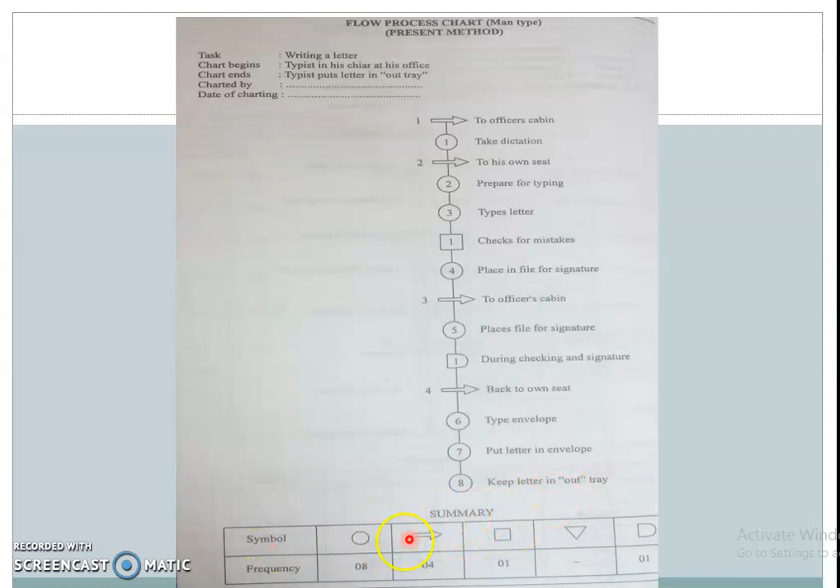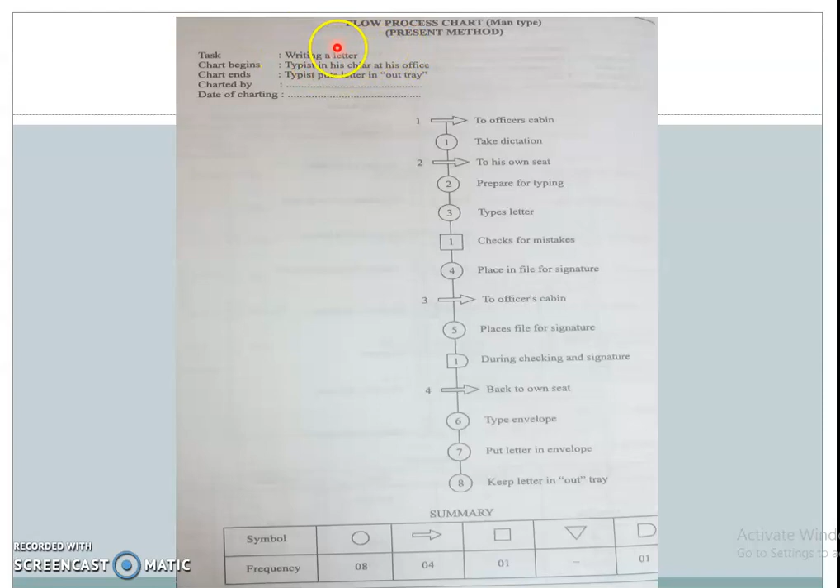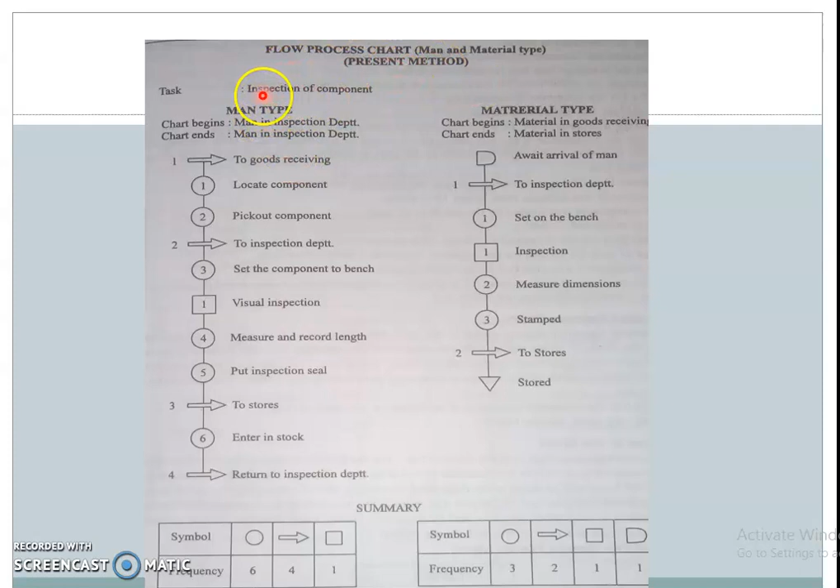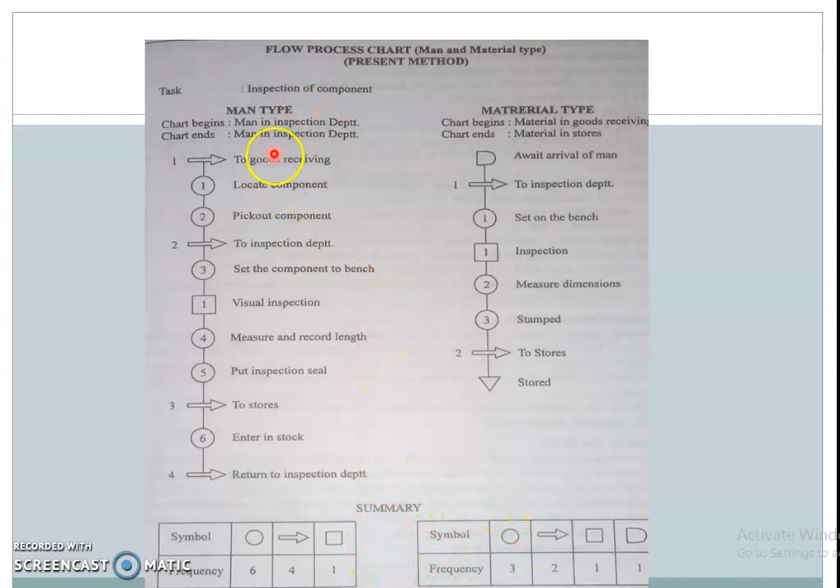So we have to summarize here how many symbols are used, how frequently they are used. So this is the summary of flow process chart, man type. Here we discussed one example of writing a letter. Similarly, you can go through these two examples of inspection of component. This is material type example. This is for man type example. And both of the summaries are mentioned here. You can go through these two examples. Let us move on.

So now, in man type flow process chart, the movement of supervisors, executives can be recorded on FPC man type. This chart follows one man or group of workers performing the same activity in sequence. So it is used for the jobs which are not highly repetitive or standardized, such as movement of workers in service or operations. So it is a practice to attach a sketch showing the movement of workers during the operation.

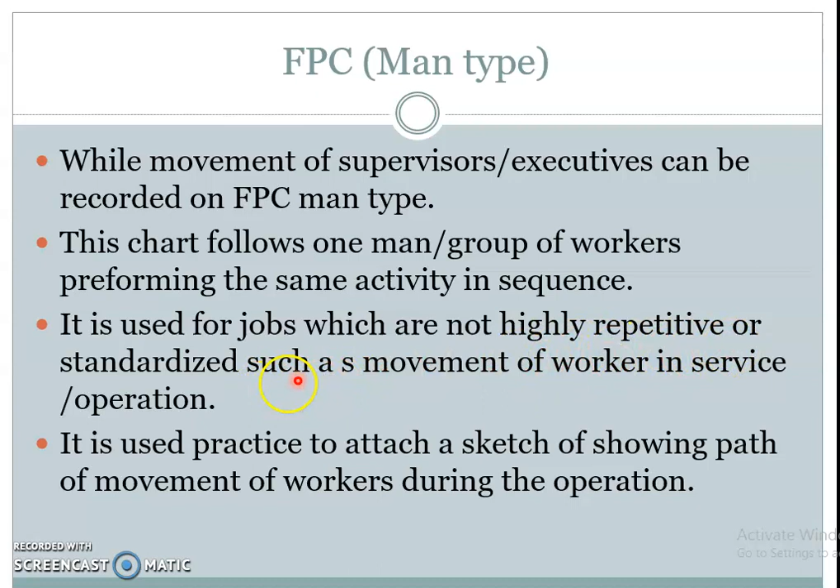So this is for the man type flow process charts. You keep in mind this. It is used for the jobs which are highly non-repetitive or non-standardized. So man process chart is the typical one.

Now let us move towards the third process chart, where only activities in sequence are mentioned but the time scale is not mentioned. So two-handed process chart, in short it is called THPC. Two-handed process chart focuses mainly on the study of work of an operator at a bench. It is a process chart in which the activities of hands of the operator are recorded in relationship to one another. So it is also called operator process chart sometimes. It is the most detailed type of flow chart, in which the activities of workers' hands are recorded.

So the two-handed process chart is normally confined to the work carried out at one single workplace. This also gives us the synchronized and graphical representation of the sequence of manual activities performed by the worker. So this chart shows the movement of hands and sometimes the feet of operator, either moving or static, in relation to one another on a common time scale.

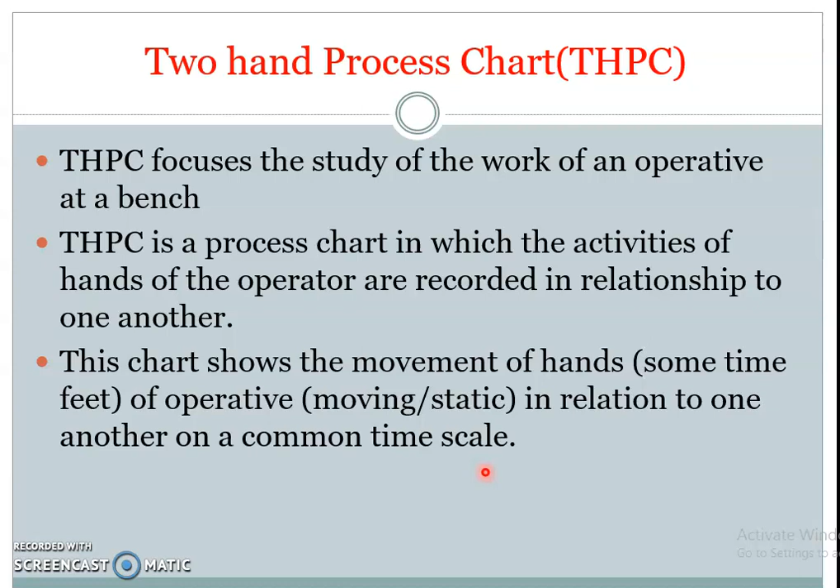So in two-handed process chart, an operation of flow process chart may be broken down into a number of elemental activities. It uses 4 elements of handwork, that is operation, delay, hold, and move. So its main advantage lies in highlighting the non-productive elements such as unnecessary delays and holds, so that analysts can take measures to eliminate or shorten them.

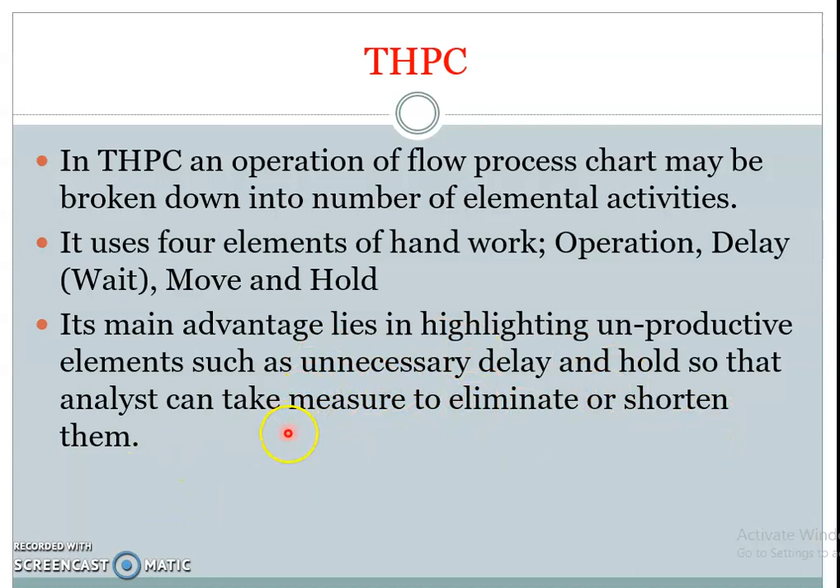So unnecessary delays can be eliminated or the time can be shortened. So this is the advantage of the two-handed process chart. Now let us discuss the charting symbols used in the two-handed process chart.

So basically all the operations which are being recorded in a two-handed process chart are of a worker who is sitting at one position. Therefore, there is no movement at all. So the symbol arrow is ignored in these charts. The symbols used here are operation, that is, a circle is used.

It is used for activities of grasping an object, positioning an object, use, release, to record an activity, use, to release the component in the tray. So these are the activities depicted by a circle in the two-handed process chart. Then we have the symbol transport. It is used to represent movement of hand or limbs to and from the work, tools or materials. We can use the symbol arrow here.

Then we have to show if a hand or limb is idle. Then we can use the symbol delay, that is capital D. Here the symbol inspection is ignored. Right, please let us correct what we had said before. Then the last symbol used here is for holding a work, tool or material instead of storage like in FPC. So these are the set of symbols used in two-handed process charts.

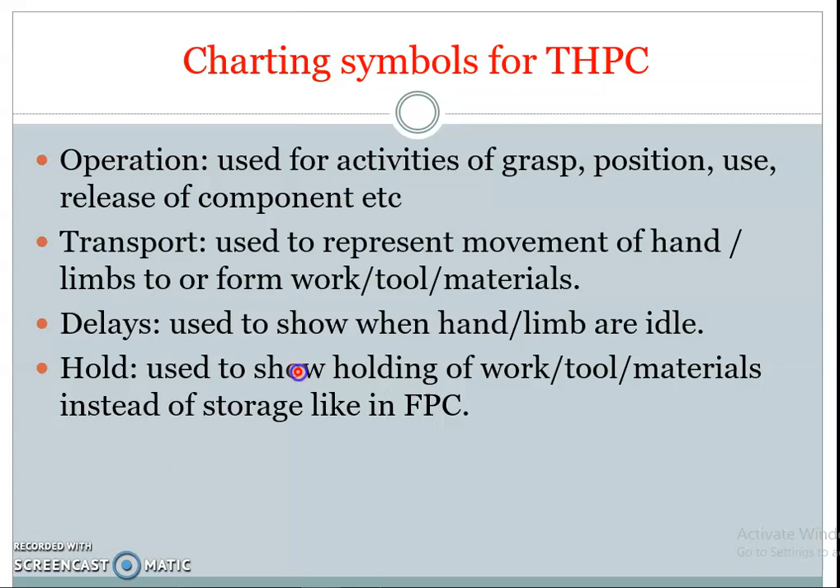Then let us see how the two-handed process charts are prepared. Here we have to study the operation cycle a few times before recording. Chart one hand at a time. That means you have to prepare a chart of one hand at a time. So don't record more than a few symbols at a time. The action of picking or dropping a part may be good for the beginning of a work cycle. So we can use this action, either picking or dropping, at the start or at the end respectively.

Record actions on the same level or row if they occur simultaneously or at the same time. If actions occur in sequence, they must be recorded at different levels or rows. So keep in mind, this is important for preparing a chart. And we must be careful about combining operation, transport or position unless they occur at the same time.

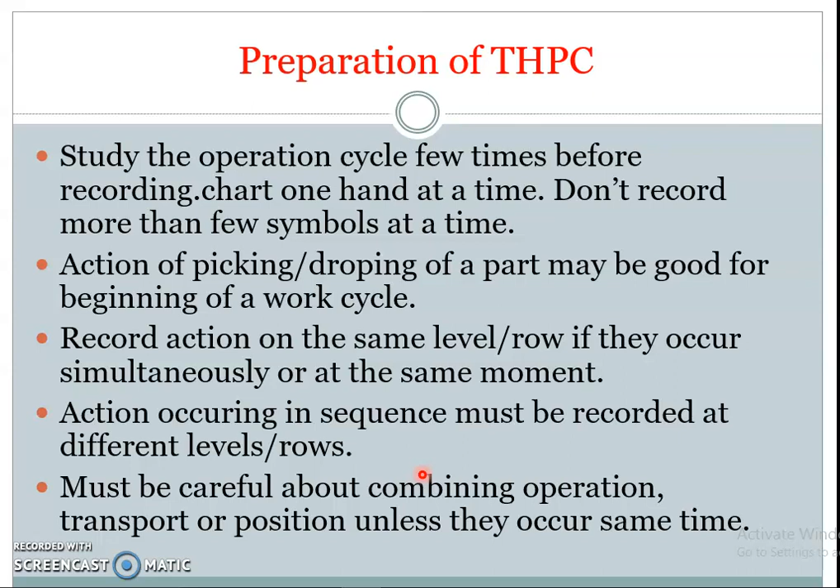These charts are very useful to know what the left hand will be doing when the right hand is working, or vice versa, at any point of time. So here usually all the 5 symbols are used, and inspection and storage are not used in the conventional sense. The inspection symbol is used when touch or feel by hand is to be recorded, and the storage symbol is used when the hand is used as a grip or vice to hold the object.

Now here is an example of a two-handed process chart. Let us discuss a task: assembly of nut and bolt. Both hands are free before the assembly and both hands are free after the assembly. We have to mention the name of the person who has charted and the date of charting. So this is the left hand chart, this is the right hand chart. For holding the bolt we use a special symbol, that is the storage symbol, and the inspection symbol is used to touch or feel. So this is not required in these charts.

So first the left hand will reach for the bolt while the right hand will reach for the nut. Both will grasp the respective bolt head and nut. Then they will carry them both to the central position. Then the bolt will be held in the left hand. The right hand will place the nut on the bolt and screw it. At the same time the left hand will be holding that bolt.